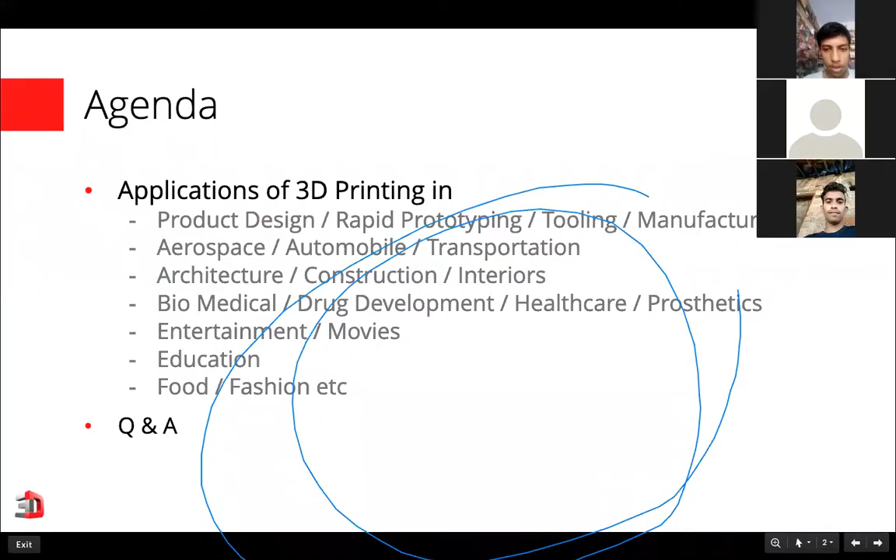All right, while he's at it, thank you. While he's at it, if you're on the chat, could you just hit me up with what you know about 3D printing? Or chat is disabled, is it? Enable, sir. Sir, please. Great, thank you.

So is there anyone who knows what 3D printing is? I would like to keep this question open for a few seconds. You can just hit me up. I'll see how many of you get it right, and from there I'll take it forward. Rapid prototyping technique. Okay. Anyone else?

So rapid prototyping is more of one application of 3D printing. Could you be more specific on a much broader aspect what 3D printing is? Physically printing a CAD model slice by slice. Okay, Akhil, great. Anyone else? So feel free to hit me up with the answers. There's nothing right or wrong over here. Additive manufacturing technique, great.

So while we keep listening to these answers, I'll just go ahead and explain what they mean and how correct or wrong, or how I can change your perspective. Somebody said it's an additive manufacturing technique. So 3D printing is actually a very simplified term used for additive manufacturing, because we don't want the common man to use a very complicated term like additive manufacturing. For us engineers, maybe it makes sense to use complex terms, but for the common man, it has to be something very simple, and that's what 3D printing means.

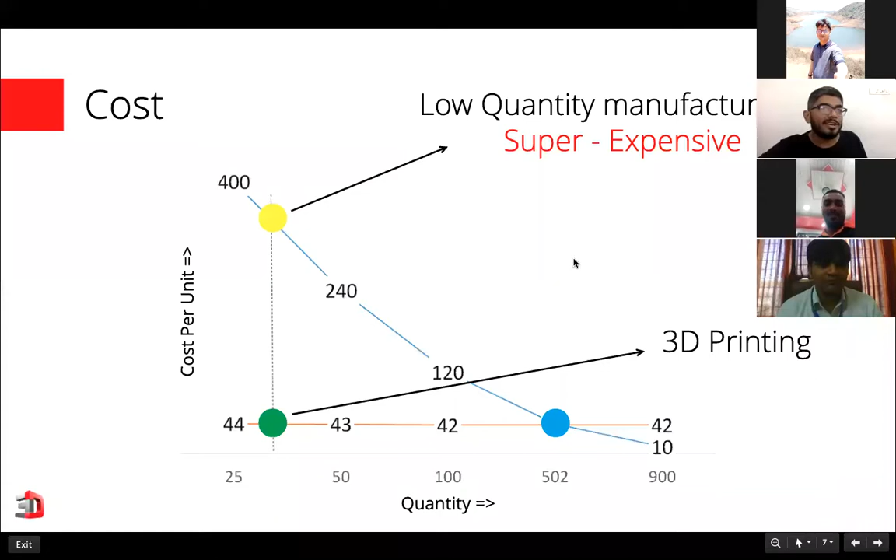So I was saying that quantity is a key factor to choose between 3D printing versus conventional methods. Now that we are clear why 3D printing, let's go into some applications of 3D printing. Or even before that, some advantage here. Somebody just mentioned the process flow involved in other methods is much larger compared to 3D printing. You were right. In conventional methods, you need to bend, weld, grind or drill holes, etc. A lot of process involved.

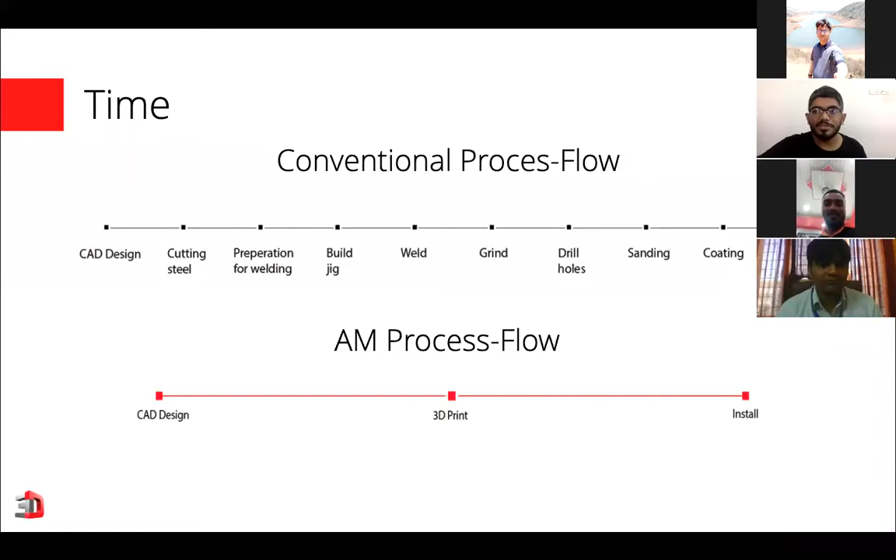In additive manufacturing or 3D printing, you conceptualize a design and you go ahead and 3D print it. There's one more additional step which I haven't mentioned, where we post-process the objects. Not always are the objects strong or polished. So in cases like that, we make sure they are post-processed and then we go ahead and install. So in a matter of 3 or 4 steps, you have your final product ready. That's one key advantage. And let's go into a few applications of 3D printing.

Now, before I start talking about applications, it will be great if somebody can say which industries 3D printing can be used in. You can hit me up on the chat. Your director was talking about medical applications. Your director was also mentioning prototyping. Somebody else on the chat, I believe Mr. Vishal, said rapid prototyping. Are there any other industries you can think of? Just give me the industry's name alone. Like, let's say I was trying to make parts of robots with 3D printing. So which other industries can benefit from 3D printing?

Okay, I'm not able to see the chat for whatever reason.

So I have a few applications. One thing that I want everyone to understand is, since this is a manufacturing technique, it can be applicable across all industries wherever there is a physical product. That's the key to understanding where you can use 3D printing. If there's any physical part for whatever reason involved, 3D printing can be utilized over there. It is just a matter of whether it makes sense or not.

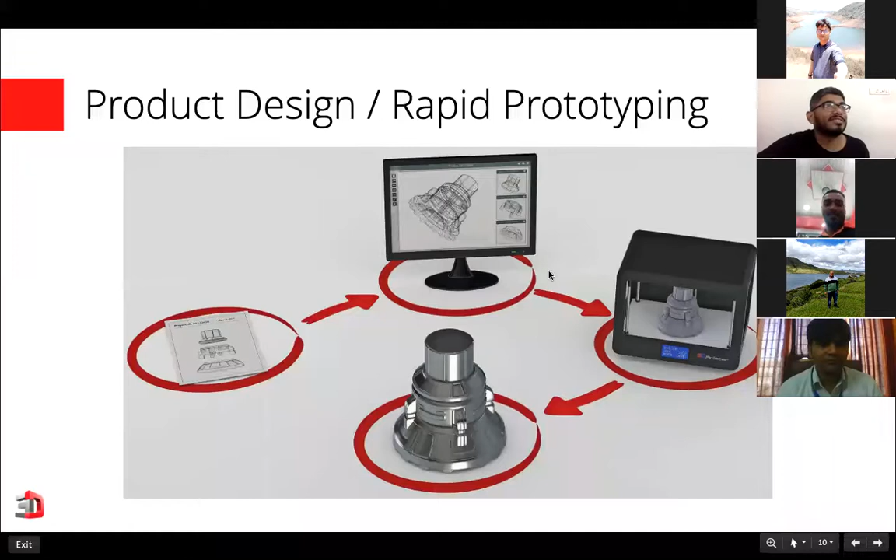All right. So rapid prototyping is a very great example. This is a personal example which I personally worked on. This is for a company called Pidilite. I believe you all have heard of Pidilite. Pidilite is the company that makes Fevicol. And those small bottles that you're seeing are the Fevicryl bottles, which they were prototyping roughly during 2014-15.

So the story went like this. When Pidilite contacted me, they had some data. Every time they created a bottle or redesigned a particular product, they were undergoing almost 30 iterations on average. 30 iterations, and each iteration costing about 1 lakh to 1.5 lakh just to get it injection molded and to see how it looks. And also it took about 2 to 3 weeks. So if you can do the math,

okay, somebody's scribbling on my screen, please undo it.

Thank you. So, you can do the math, 30 iterations into 1.5 lakhs. We're talking about 30 to 45 lakhs just for the product design, and that too not involving any R&D or anything. It's just for seeing the prototypes. And then we're talking about 30 to 40 iterations into 2 to 3 weeks. That's again a huge investment in terms of time. And during that time, they have to pay salaries for all the designers. There's a lot of cost involved over there.

And when they approached me, they asked me, can we use 3D printing, how fast can we do it? How cheap can we do it? So by my math, I was able to offer them a cost of about 1,500 rupees per iteration. And the time fell down to about 1 day just to 3D print them and then ship it. They were in Mumbai, I was in Chennai. It was a matter of 2 to 3 days for them to get them delivered. So just by moving from injection molding to rapid prototyping, their costs fell by 100x. And their time also fell down drastically.

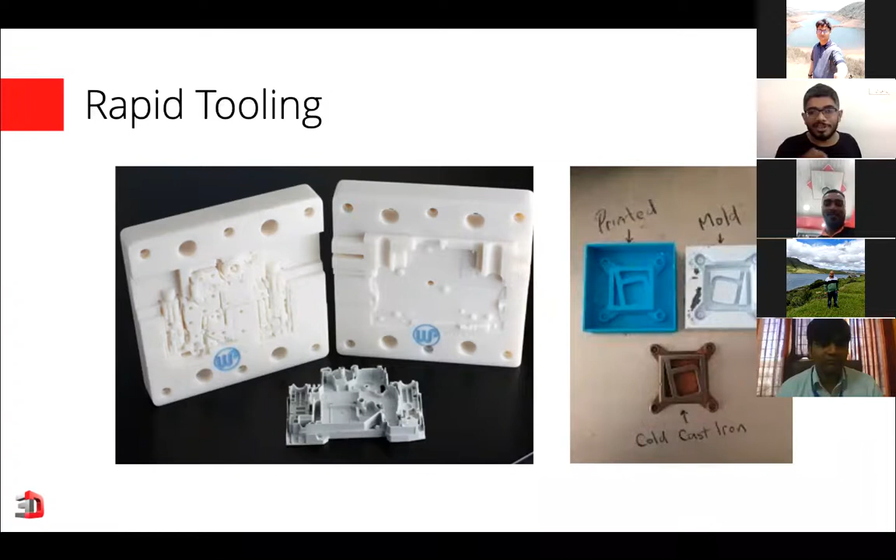So this is the second step of manufacturing. The first step was prototyping. The second step is rapid tooling. There's alternatively another version where you can 3D print a few hundred pieces itself. It's called rapid manufacturing. Again, all fancy terms. It's just that we're manufacturing at the end.

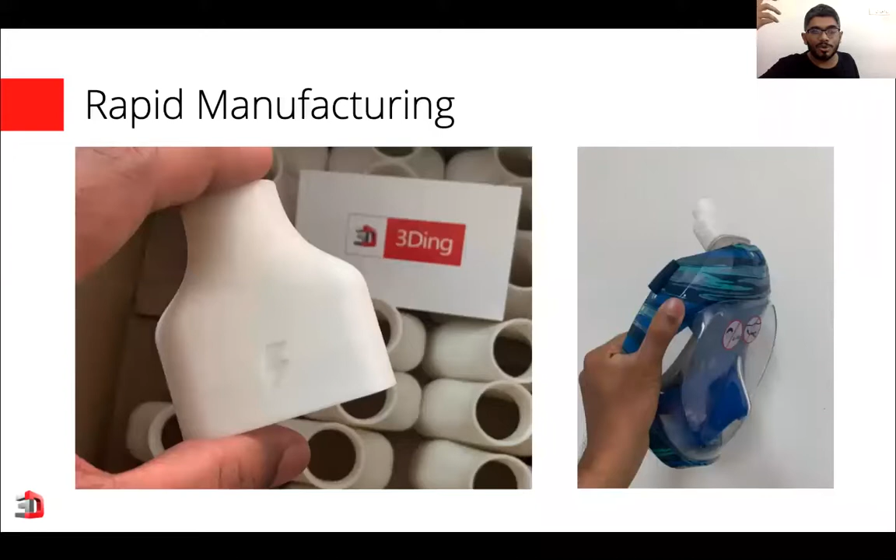So whatever you're seeing is something we did for COVID-19. I have this on my desk right now. The idea over here is we're working with a rural development trust. They wanted to use these snorkeling masks. I don't know if you can see me on the camera. And they want to connect these to oxygen masks so that they can be used as protective PPEs for doctors as well as for patients, so that the virus doesn't escape into the room where doctors and patients are together.

So they've successfully tried this out, and we manufactured a few hundred pieces, and they started distributing to all hospitals around. And as we speak, they're using this. So this whole concept from design until implementation took hardly a matter of a few weeks. And that few weeks was also because of the lockdowns, and logistics were not moving. Right.

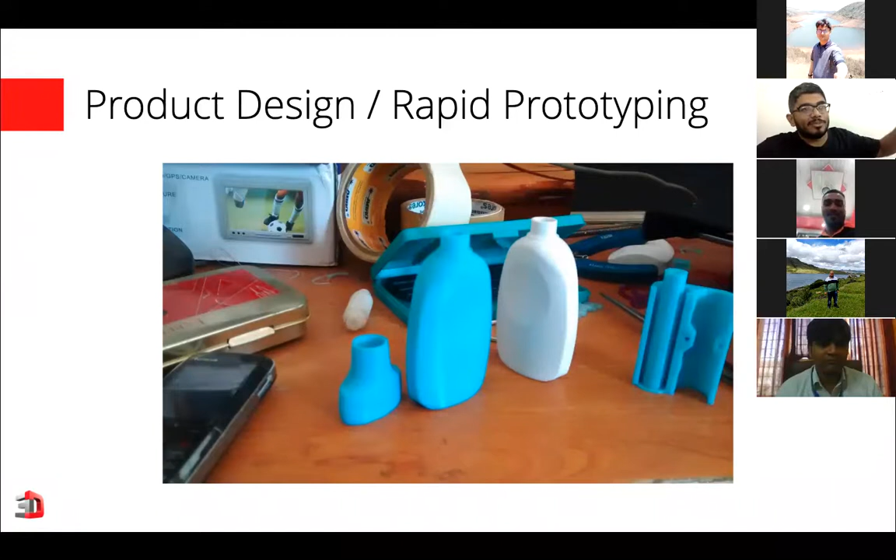So now that said, I'm going to touch on a few applications. Whatever I told you was in terms of how somebody could approach a design, prototyping it first, then making some tools, and then probably even manufacturing a few pieces, right? So aerospace. Whatever applications I'm going to touch on right now need not be doable on a low-end 3D printer. These are just to give you an idea of what is possible practically.

Whatever you're seeing right now is the rocket engine of the rocket called Dragon. I believe you all have been hearing of Elon Musk's SpaceX over the last few weeks or months. Whichever rocket went up to the ISS carrying humans, that rocket's engine is what you're seeing. And this is a 100% 3D printed rocket engine. SpaceX or NASA, for that matter, does not mass manufacture rocket engines. They have to manufacture only a few units. And so for them, it makes complete sense to manufacture with 3D printing.

So it's done in about 3 or 4 different parts put together. By doing 3D printing, they can eliminate methods like welding. The moment you eliminate welding and places where you join, you're actually making the parts stronger. In any metallic structure, wherever the welding is done, that is the structurally weakest point. So eliminating all those things is of great significance in aerospace. The engine is called SuperDraco, and that's one application in aerospace.

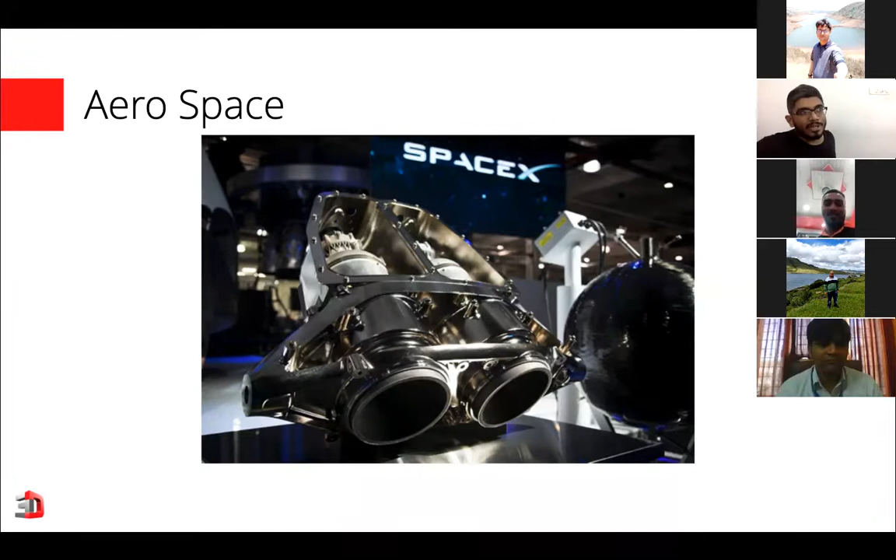Another application I can talk to you about is the actual in-space application. Now, this is something that makes a lot of sense because in space.

You all know there is something called the ISS, International Space Station, which is a lab in orbit, and humans live there to do zero gravity experiments. Every time something breaks, or they require a new item, they have to wait until the next rocket goes from Houston, Earth, to fulfill whatever requirements they have. That's not always a very viable thing.

So they got a 3D printer up there. It's made by a company called Made in Space. Made in Space is a brand. They have a zero gravity specialized 3D printer where it uses vacuum to make sure the material is stuck to the ground and doesn't keep floating around.

The idea is, if these astronauts require some special part, some wrench, some screwdriver, some nut, or could be anything, all they have to do is convey that message to the engineers sitting at NASA. They'll design those files, send it as an email to the machine directly, and the machine starts building it. Once it's ready, astronauts can take the part and use it wherever they have to.

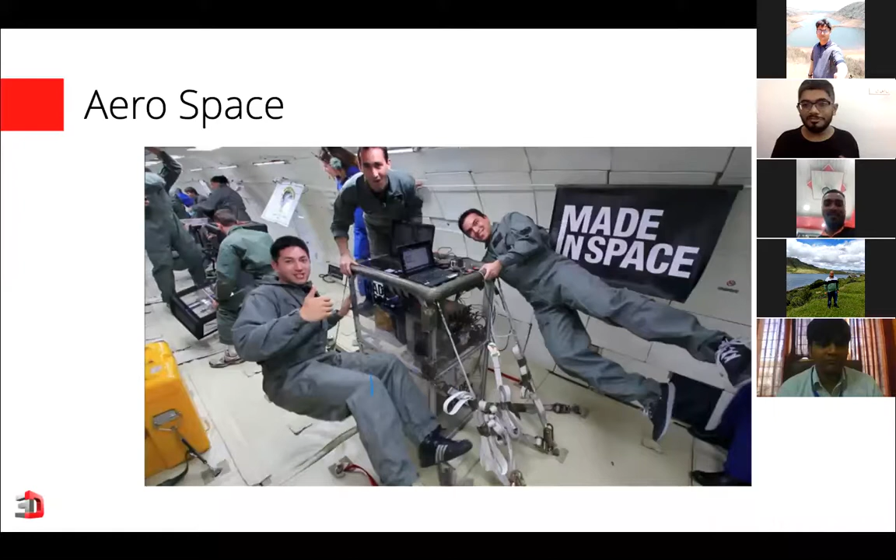At the end of it, if they are done with the part and don't need it anymore, they can even recycle it back into its raw material format. What I'm trying to say is, you can manufacture or make whatever you want, wherever you want. Space is the best example. Tomorrow, if we land on Mars, we don't really have to carry everything from here, but we'll try to make use of materials or silicon on Mars to build structures, houses, whatever.

This is again something we did, in collaboration with students, actually a student project. NASA has a competition called Cubes in Space. Every year they launch the world's lightest satellites into space. For the last two years, if you've heard of satellites called Kalamsat and Jai Hind INS, these were 2018 and 2019's world's lightest satellites, both won the competitions.

These were 3D printed in our labs. It was designed by students, and we helped them design and 3D print to make sure they were very light. One was done in nylon, the other in carbon fiber. The whole satellite's weight was only about 33 grams.

Automobiles. The automobile industry is one of the key applicants for 3D printing, because there's a lot of aerodynamics involved, a lot of testing that can go through. For every test, they don't have to invest in injection molding or forming methods, but rather they can 3D print it, use those structures to test designs out, and then if it makes sense, they'll go into mass manufacturing.

Apart from these, all sorts of concept designs. For example, the movie iRobot, Will Smith's iRobot from 2004 - the car he drives, the Audi RSQ, was completely designed and manufactured with a 3D printer. Similarly, in a few James Bond movies, all the exotic concept cars that were not out in the market yet were actually 3D printed for the movies. That's one example.

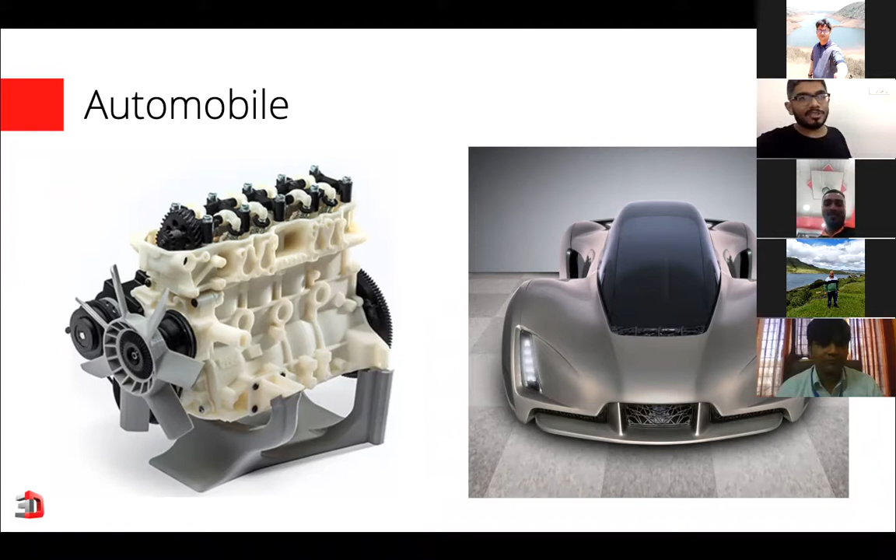Hyperloop - I believe you've all heard of Hyperloops. Hyperloop concepts are supposed to be transportation modes where you can move from one area to another at speeds of 1,000 kilometers per hour in vacuum sealed chambers. The point here is, all these concepts have to be tried out with 3D printing only - there are no other cheaper alternatives. Even in India, there are Hyperloop teams doing this.

Next is architecture. Here, we can talk about two different things. One is scale models.

In the current techniques available, people generally used to make models out of thermocol, acrylics, cutting them and putting them together, etc. Today we don't really have to do that. We just give the CAD design to a 3D printer, and the printer completes them, giving us the finished design in a matter of a few hours.

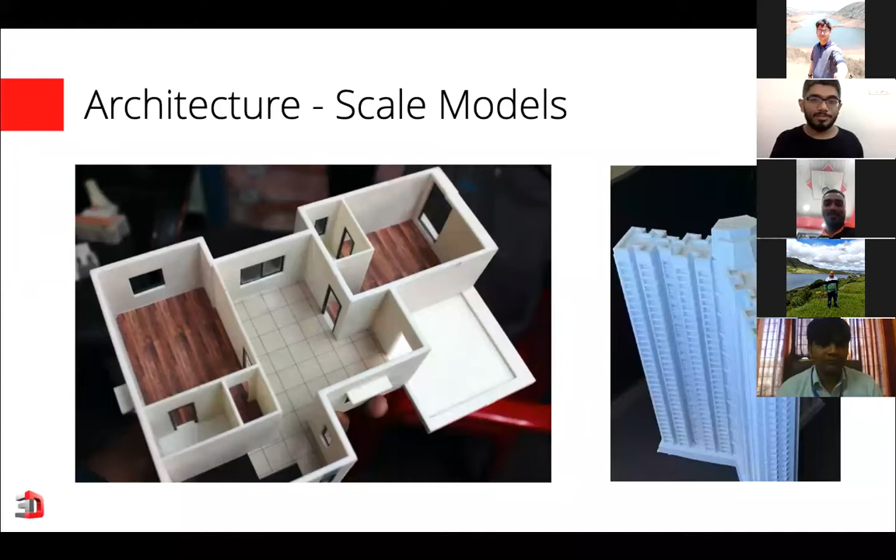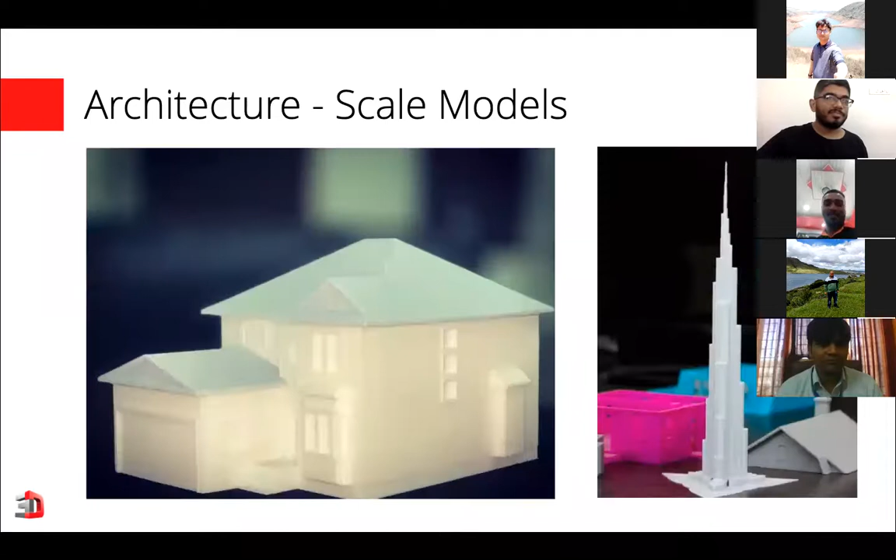So these could be used commercially. For example, if I'm a builder and haven't built the apartment yet but would like to sell it, the concept is ready in 2D. Probably you can show images, but rather, if the customer is willing to pay an advance of a few lakhs, why not give him a miniature model of his house as a memento, as a token? Yeah, that makes a lot of sense.

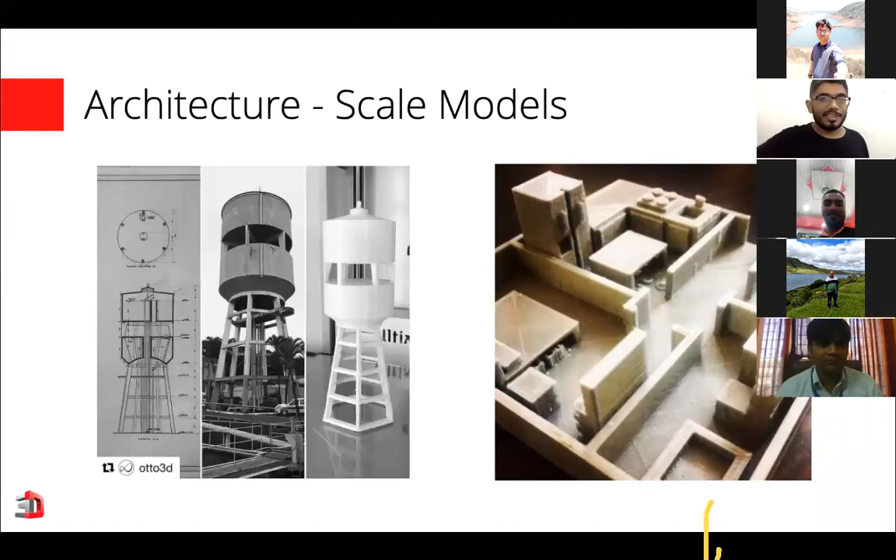This next part in terms of construction is called contour crafting. I believe you've heard news where China built a hospital for COVID-19 in a matter of 5 or 10 days, right? Similarly, even before 1 or 2 years, you might have heard of a 10-story building built in about a week or 10 days. They all use a method called prefab, which means they have prefabricated blocks of buildings ready which can be assembled like Lego kits and then binded together.

So they make sure to use ready-made pillars, windows, pipes, and all the plumbing and electrical works - those are all prefabricated and kept ready in different dimensions. The robotic arm just picks and places them wherever required, while the 3D printing arm keeps laying down walls and filling up wherever material or concrete is required. That's called contour crafting.

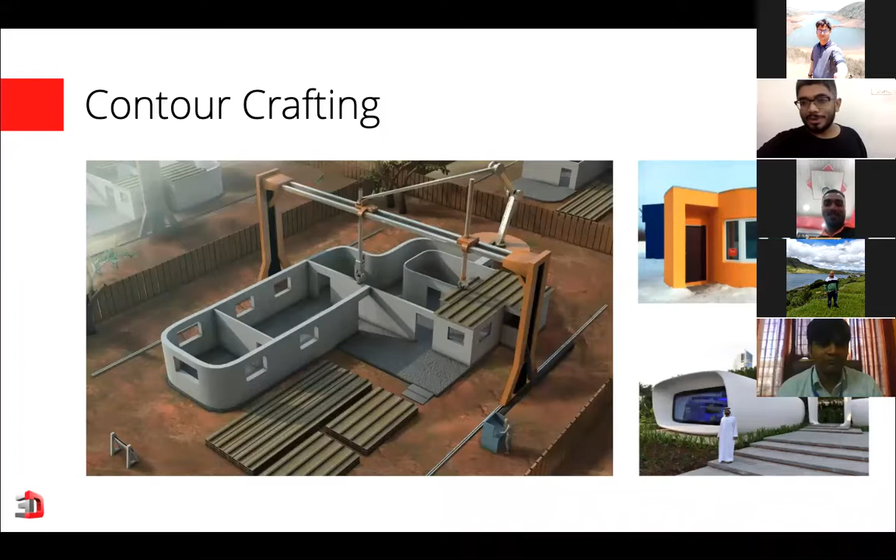Okay, let me go faster. Right now I have food.

So what this guy did is he took about 3 different food items which are cooked but then completely dehydrated, and then stored as powdered consumables. These food particles are virtually never going to decompose. So you can put these on rockets going to the Moon or Mars, and they can supply food for the long-term process. Now the application here is very interesting.

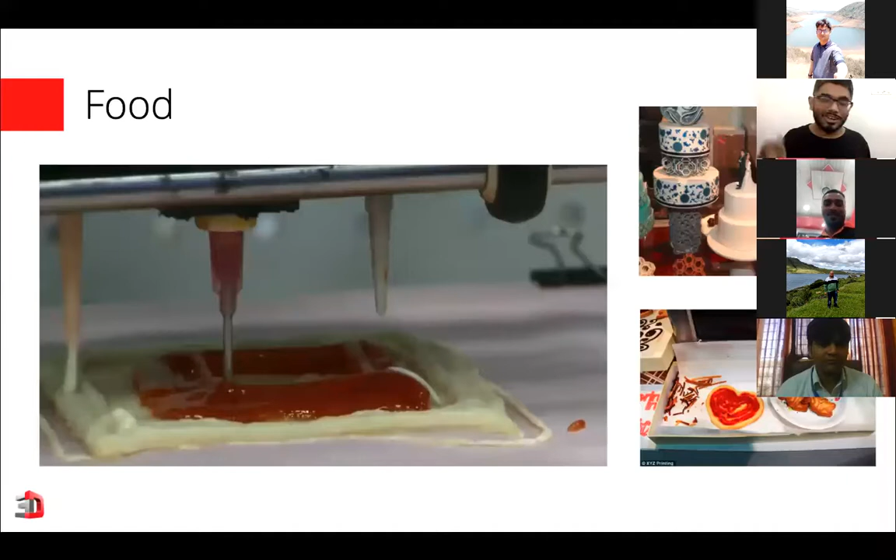Today's software is very sophisticated. You write software to take X amount of some material, Y amount of some material, mix them up, heat it on the fly, and then extrude food. Like on the way to Mars, you can have chicken margarita pizza. So you have ingredients in powdered, non-decomposing format, and software recipes. You club them both, and you have whatever item you want for the long run. That's being worked on by NASA.

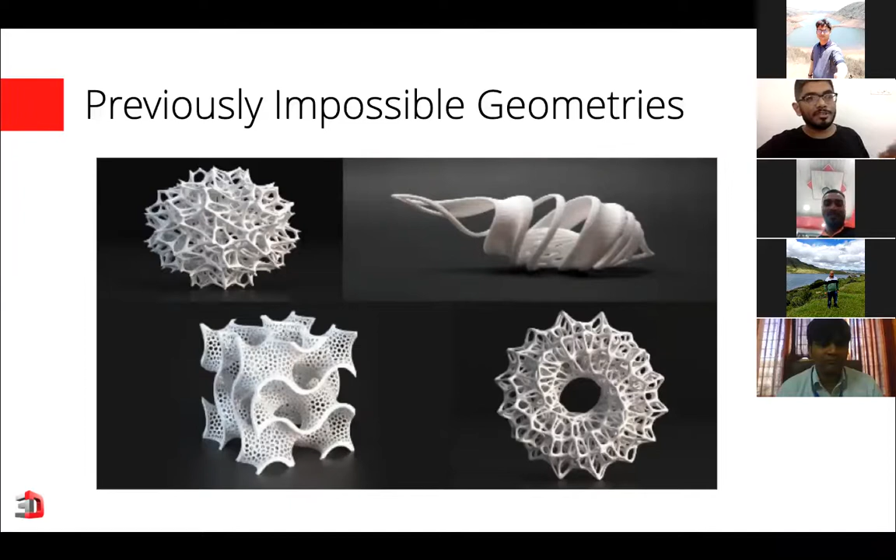Fashion. This is something very interesting. If you look at shapes like these, they were impossible previously. You cannot really make shapes like this with any other manufacturing method. But with 3D printing, you can make complex structures like these, and you can club it with fashion. You can come up with very innovative, creative designs.

Education. The biggest advantage in terms of education is something I would call spatial thinking. For example, my generation, or at least those of us in our 30s, the biggest technology we were exposed to as kids was computers, in the 1990s or 1980s. So if we're able to sit like this and talk today, it's because somewhere Zoom's founder was exposed to computers, and much later had concepts he could develop into a video conferencing tool like this, which we use today.

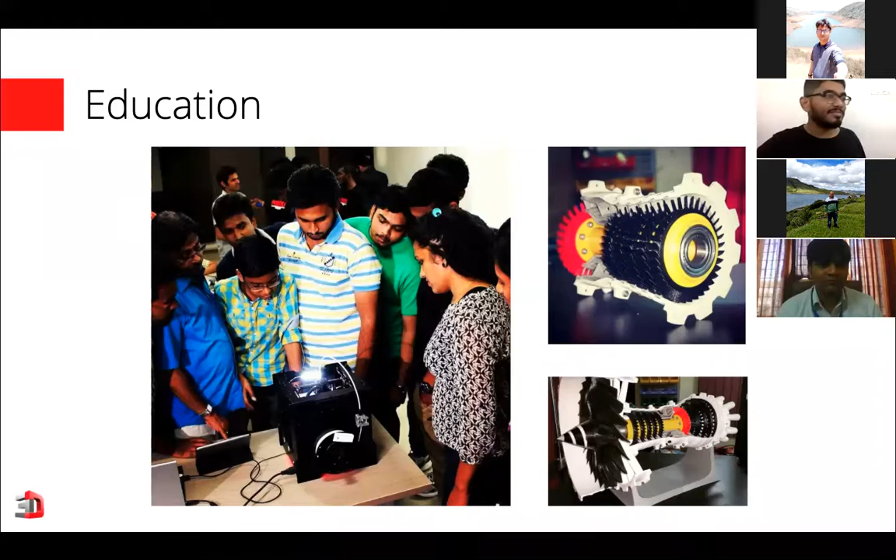Personalization. This could take a long time to explain, but the idea is in the future you don't really have to buy items of size 8 or size 9 or size 10, be it shoes or spectacle frames. Rather, somebody could just scan your head or your foot, and then you can order whatever items you want. Just like I want this particular shoe design that's already available on a computer, but I want it to fit exactly my leg size. So, 3D scan it, get it manufactured, maybe in one or two days, and get it delivered.

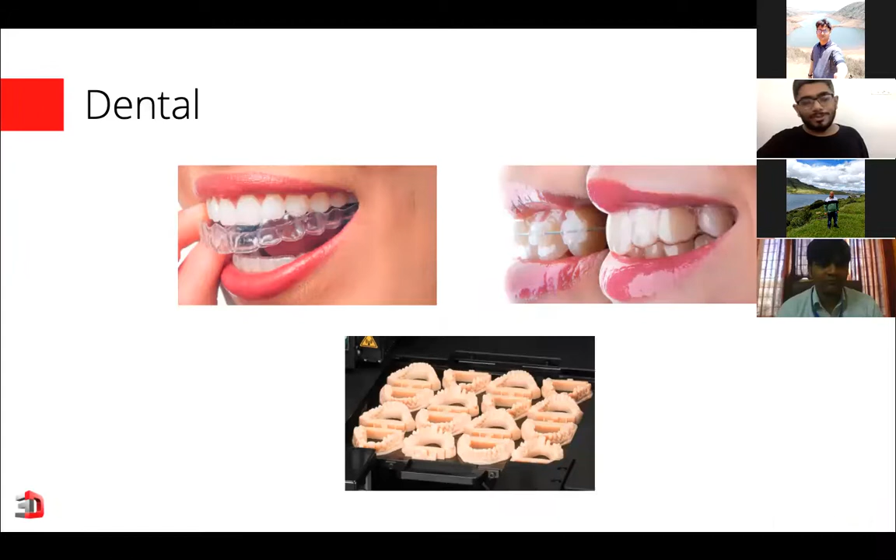Prosthetics. This is a concept called Project e-NABLE, where you can have mechanically integrated prosthetic arms, and fracture casts that are more stylish and more breathable. In dental, there's a lot of innovation going on. All the metallic braces that we used to use previously can be replaced with transparent or translucent 3D printed braces, which you can see in the image on the right. Previously there were metal braces, and right now she's actually wearing transparent braces. They're expensive today, but it's just a matter of time before they become more affordable.

This is a very interesting concept where an entire skull was completely reconstructed of a baby whose face was deformed. So the application here is, no surgeons can perform a live surgery on a baby by cutting open the skull and joining it together and deciding the whole process on the fly live, right? So they 3D scanned her entire cranium, her skull, 3D printed it, and did multiple rehearsals, practice surgeries. And once they were confident enough that they can perform the surgery, they went ahead and did it.

So the baby's name is Violet. You can Google her name. "Violet has a new face", that's the title. And you can come up with case studies on how it was done. It's very popular.

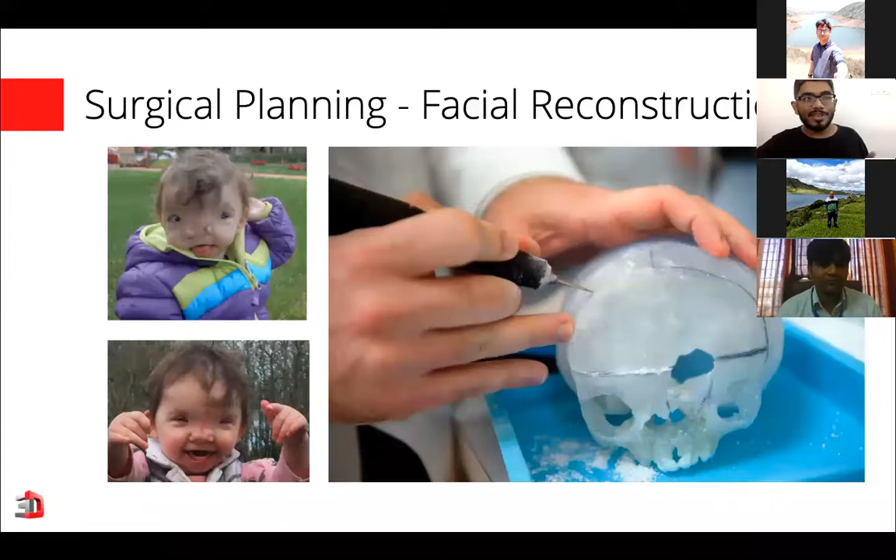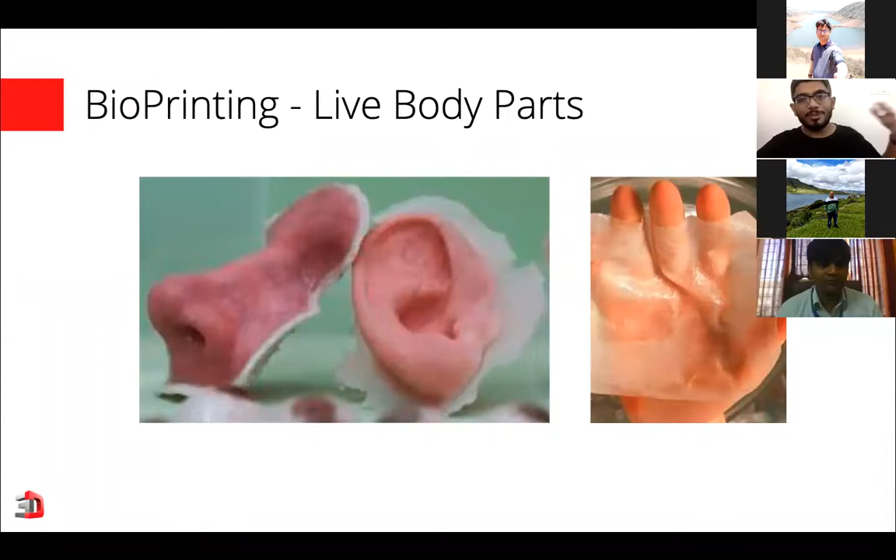So bioprinting. These are another innovation where we can take body cells of humans, like ears, like skin, etc. You incubate them in a lab, and once there are n number of cells ready, you can push them into a 3D printer, and then you can create a live functional body part which can be put back onto the human. It's again another application where you can test medicines on such 3D printed organs rather than testing them on humans, right?

So imagine if there was a lung 3D printed out of lung tissues, and COVID-19 can be injected into those artificial lungs in a lab, and then all the drugs or vaccines can be used on the artificially created lung, which is functionally working. So that's an experiment where you're testing on human tissues, but not really on live humans. So that's something about bioprinting and drug delivery. I don't want to go very deep into that, but that's something that we've been working on.